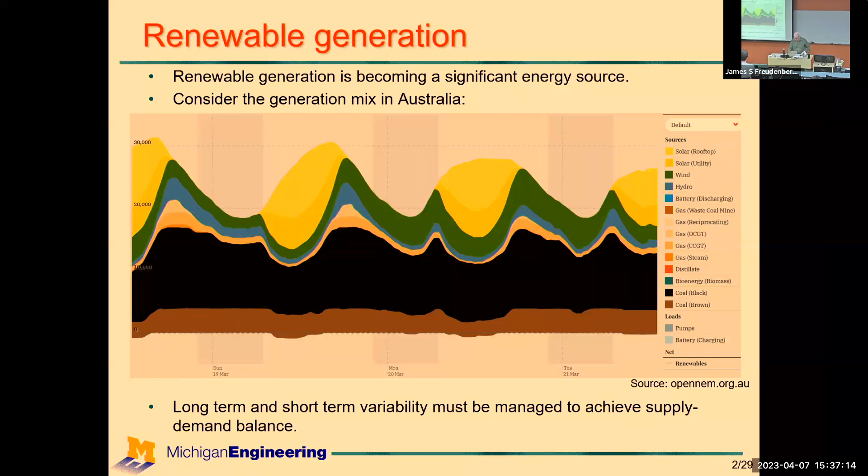So what we want to achieve is non-disruptive load control. What does that mean? It's being able to establish some level of controllability from loads in a way where the consumer is not impacted at all. They're oblivious to the control action going on. So it's non-disruptive to the load.

Load shedding, load control in a coarse kind of way has been around forever, but it is disruptive. On a hot summer's day, just when you want air conditioning running, it gets interrupted because there's peak load and they need to shed some load, which is quite disruptive for the consumers.

We want something that we can exploit without consumers having any knowledge of that. Some of the work we've looked at is large loads like building heating, ventilation, air conditioning type loads, but I'm not going to talk about that today.

I'm going to focus on harvesting controllability from large numbers of small devices. We've put a lot of time into looking at thermostatically controlled loads, so air conditioning, refrigeration, heat pump type loads, and exploiting that to levelize the variability in renewable generation. One can do similar tricks with things like electric vehicle charging, and I'll talk a little bit about that at the end as well.

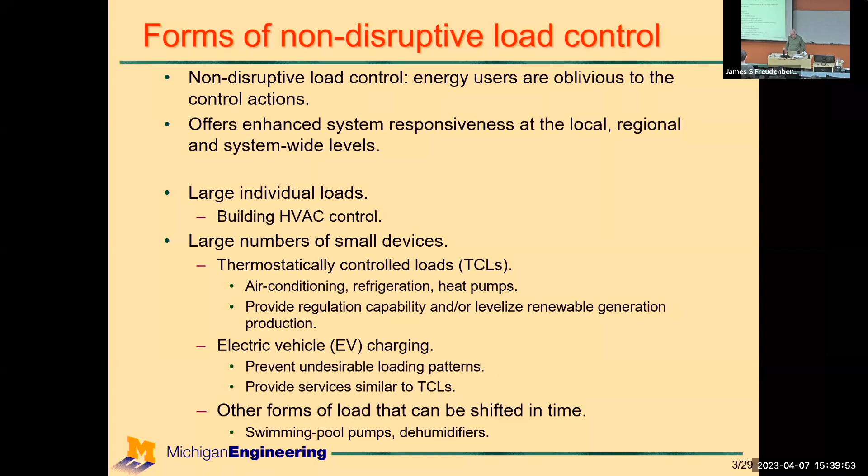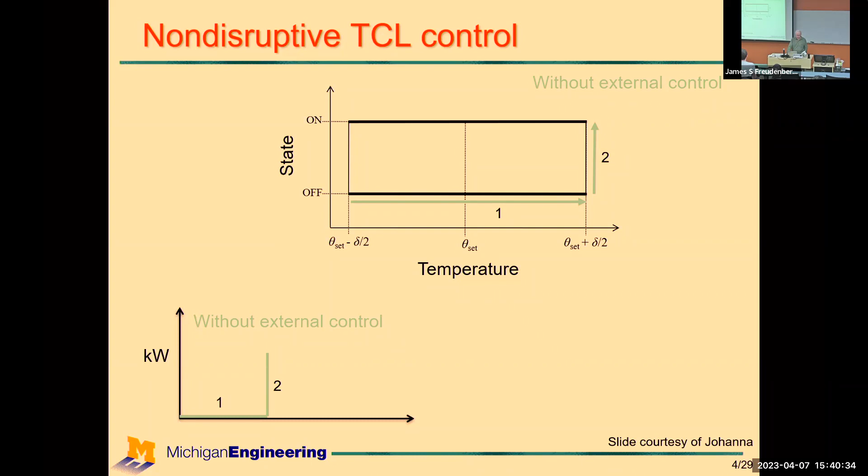So I stole this slide from Johanna, but it nicely illustrates the concept of non-disruptive control of thermostatically controlled loads. If we think of the normal pattern of loading for a TCL, when it's off the temperature is rising, and then it turns on when the temperature reaches the upper threshold of the hysteresis band. Then it's on for a period of time and cools the space down, then turns off again and proceeds around the limit cycle.

We can introduce a control strategy that says, okay, we want this thing to run differently. We allow it to be off and the temperature is rising. Before it gets to the upper threshold, we turn it on a little bit prematurely, and then we cool down. But before it gets to the lower threshold, we turn it off a little bit prematurely as well.

The outcome of that is we get these pulses of demand, and we can move those pulses of demand around. If you think about an individual pulse, well, what can we do with that? But when you aggregate it across tens of thousands, then you get a significant amount of controllability out of that. So that's the general idea at the grassroots level of each individual device.

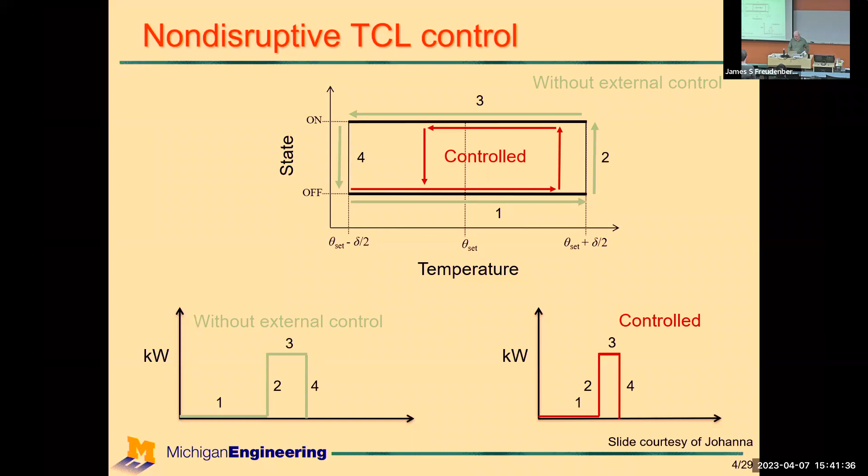But stepping back, what is it that we want to achieve with ensemble load control? We want to be able to meet competing objectives, that the load has certain requirements that have to be met, but we want to provide some system service as well. And they are usually competing, as we've sort of seen.

There's also this idea that load control strategies must be consistent with legacy operating philosophy. There's an enormous amount invested in the way power systems operate now, and that's not about to change. It probably couldn't change. So we need to have some overall load control scheme that is consistent with that higher level power system operational strategy.

But we also need to be able to access or send some signals out to the individual loads, and keep in mind this is large numbers of loads, tens of thousands, potentially millions as schemes grow. To do that from a centralized fashion, where there's some central controller individually addressing all of those loads, doesn't seem like a particularly practical outcome.

So the idea that we have exploited is to say the load aggregator is broadcasting a common signal to all of the loads. They're listening and receiving the common signal, and then they interpret that for their own individual circumstance. Each load makes its own local decision based on that broadcast message that's being sent to everybody. I'll come back to different ways that works.

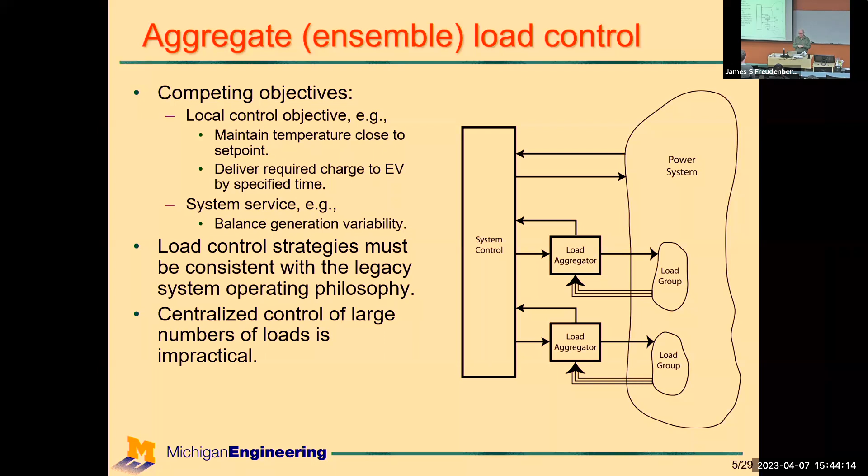So that's the load aggregator working downwards to the load side. And then on the upward side, the aggregator is receiving signals from the system operator and also providing information back to the system operator. It might be availability or price, who knows what, but there's that interface on the system side as well. So that's the overall kind of strategy we've been exploring.

Okay, so aggregation of TCLs - the way that we've approached that is we need to take into account the natural dynamics of the devices, the hysteresis-type process described a little bit before. The starting point for doing all of that is to build up a model that captures the overall dynamics of the system. We've got lots of individual devices, and we can't gain a whole lot from tracking every individual device. So we can aggregate all of that behavior together into what I'll show as a bin model.

The temperature associated with each TCL is influenced by random perturbations, things like doors opening, windows, and so forth. That's introduced in the model as noise, and we need to take that into account. And every thermostatically controlled load has slightly different characteristics, different thermal properties and so forth, so we have a heterogeneous population. So the aggregation is inherently inaccurate, stochastic, but we can still make use of it both from an analysis point of view and introduced in a control sense as well.

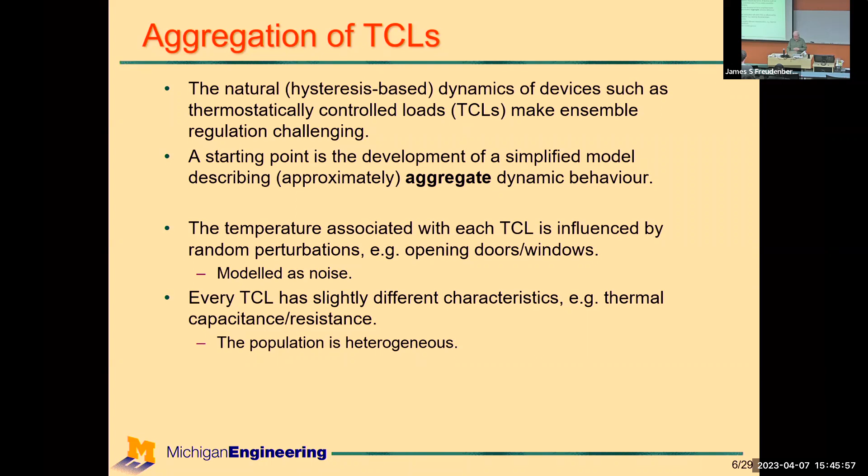The gist for aggregating or building a model of a large number of devices is this bin model approximation. So we can think of this large population of thermostatically controlled loads. We first normalize the deadband of these devices so that we can think of everything operating over that common upper and lower temperature band. And then we want to take all of the devices and map them into that common deadband.

If we think about the temperature distribution of all those devices, there'll be some stochastic distribution across large numbers of loads. We'll expect to see some distribution between the lower threshold and the upper temperature threshold spanning between those two. And also the devices will either be in the on state or the off state. So we end up with a probability distribution across the temperature band in the on state and the off state.

And then we can approximate that distribution using effectively a finite element approximation.

What that leads us with is this set of bins - in the red case - that describe the on state. So a TCL has a certain temperature and is in the on state, which places it in one of the red bins you can see there. The other TCLs are in the off state with a certain temperature, so they'll fall somewhere in the blue bins. So every device we can think of as lying in one of those bins, either the blue ones when they're in the off state or the red ones when they're in the on state.

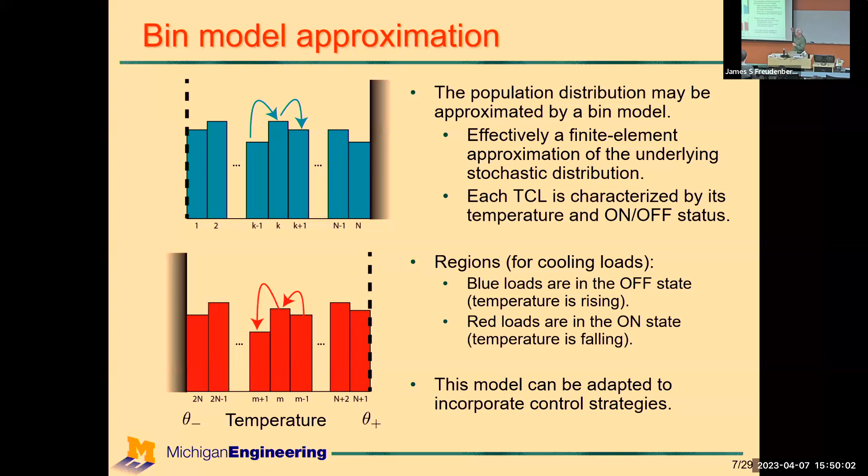We can write an alternative formulation in terms of continuous time. In that case, the steady state behavior is given by the eigenvector corresponding to the zero eigenvalue. So that's our model - we might have tens of thousands of devices, but we're mapping them into a relatively small number of states, a state associated with each of those bins.

Firstly, a homogeneous population, so there's no noise in this system and everything is identical. We assume initial condition with all the TCLs in the same bin, which is the last bin before switching on. So the dynamics are such that as time progresses, all of the TCLs switch on at the same time. Because they're homogeneous, they will then propagate through the deadband, and they will all switch off at the same time, and they'll propagate in the opposite direction and they'll all switch on. So one would anticipate coherent behavior if the model was behaving properly.

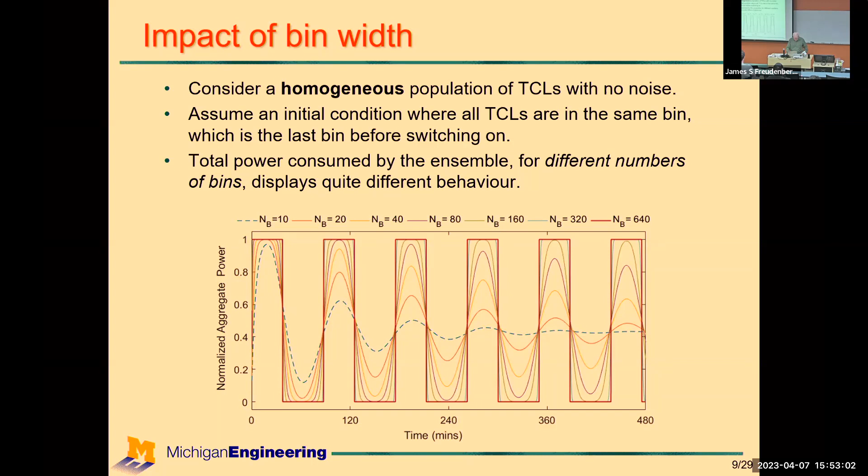In this case, we've added, firstly, it's still a homogeneous population, but now added different levels of noise. We've used the most accurate model, the one that corresponds to the square wave with 640 states. That's the case in all cases. And so if we have zero noise, we recover exactly that square wave.

But as we add noise to the system, it breaks the symmetry. So we're starting off with a homogeneous population all in the same bin. If you add noise, then that's going to spread that peak of devices, so synchronization gets broken by the noise. And you can see that there, again, is a nicely damped behavior. But in this case, that's true damping. It's coming about from the noise that is part of the system.

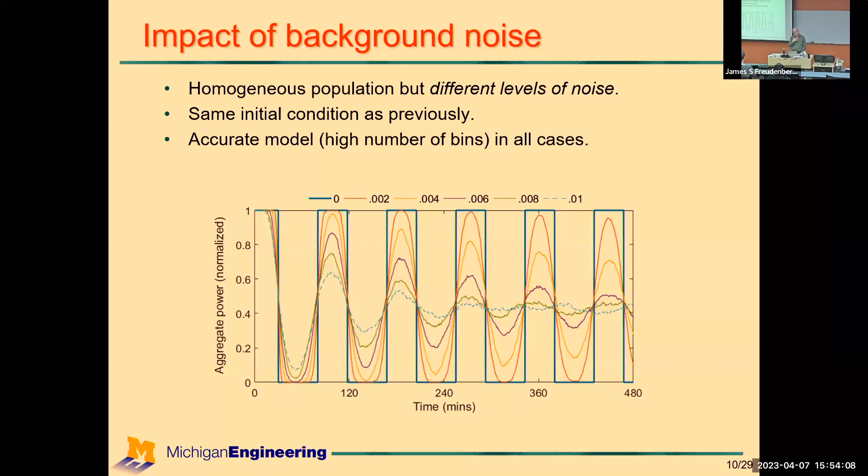So the message is modeling is important, and bad modeling can sometimes be interpreted in the wrong way. So I want to move on and look at three particular control strategies. There's a whole lot of different strategies that have been proposed, but I just wanted to look at three. And the nature of the talk is to look at ways that they all have some amount of trouble, so the message is we need to do careful analysis of these models and of these different control strategies, or we could end up with some unusual behavior.

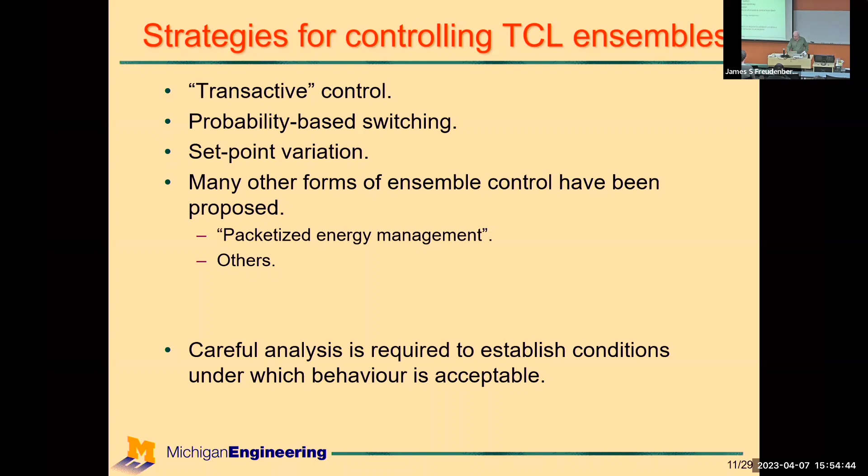So I'll focus firstly on what's called transactive control. This was pushed heavily by the Department of Energy for a while, and then fortunately they seem to have given up on that. But it's a prices to devices mechanism where now the control strategy is one that is money related.

So the idea being sort of given by this little figure here, that for air conditioning, as the temperature gets higher, my tolerance of that higher temperature weakens, and I'm willing to pay more to receive electricity to deal with that higher temperature. So there's a mapping between the temperature and the offer price. If it's a high temperature, I'm very happy to pay more. If my conditioned space is already at a low temperature, I don't really care and I'm not going to pay so much for it.

That's the general idea. So the temperature is evolving, as we've seen in this kind of normal hysteresis loop. Therefore, the offer prices that each individual is willing to offer is evolving in the same way. The market is cleared periodically. So what one ends up with is a period of continuous behavior where the devices are doing their thing, the offer prices are matching that. And then there's a point where the market is cleared, which is a discrete event on that system. So we have a classic hybrid dynamical system: a period of continuous dynamics, then a discrete event, then another period of continuous dynamics.

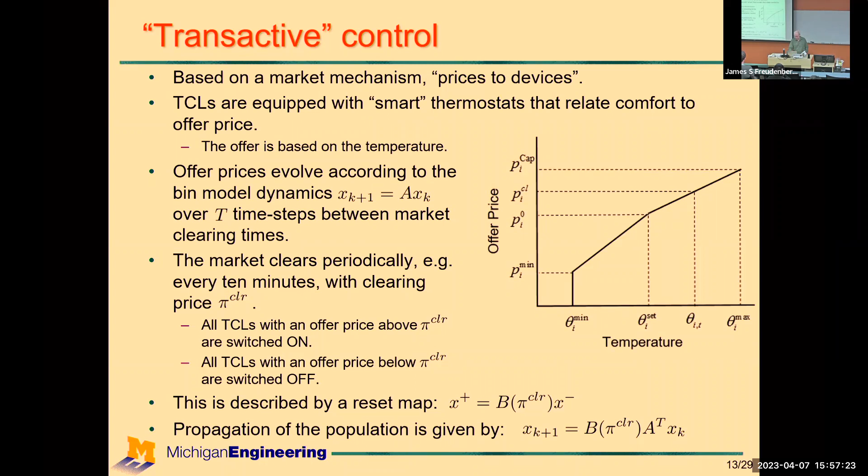This is the restart and the reset, and it's price dependent. So depending on what price is being broadcast out, it will alter the dynamic behavior of the overall population. The important thing is that all TCLs with an offer price above the clearing price get switched on, and all TCLs who have offered less are switched off. That's driving this reset matrix here.

So what does that end up doing to the overall population? If the price is low, the top one indicates a clearing price of 10 units, that's going to lead to a bunching up of the devices at the cool end of the hysteresis band. Electricity is cheap, people are happy to be utilizing that electricity, and it leads to this kind of bunching up down the far end.

The population of off states is shown in blue, the on states are shown in red, and this is the distribution at the instant prior to the reset event. So we end up with a limit cycle happening, and this is what things look like just before the reset happens.

If we transition down to the bottom, prices are now high, up at 30 units, and accordingly, people are less willing to cool their space, so the overall population of TCLs migrates towards the top end, the hot end of the schedule. In between, as the price varies, we can see there's that migration from one end to the other.

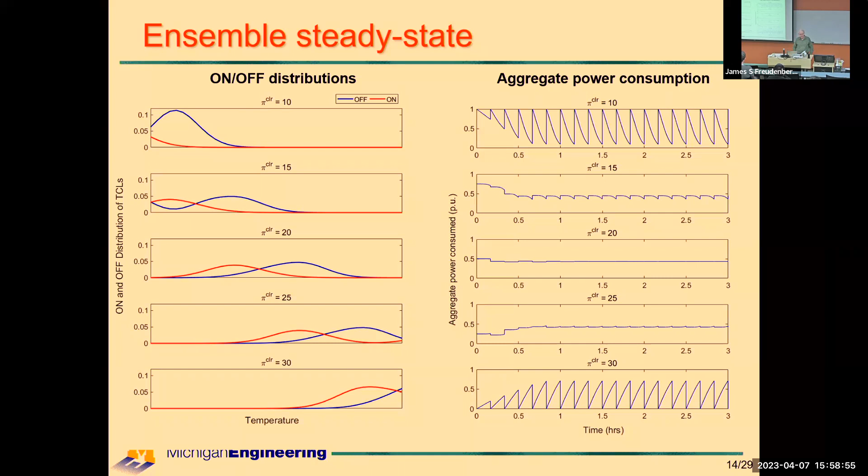One of the interesting things is that if you introduce a dither in the price, then you can actually synchronize all of these devices. And I'll show a little video if it works.

I won't show it if it doesn't. It's one of the joys of Microsoft that it kind of works every other time, but not when you want it to. Okay, we'll forget that.

It was working before. Anyway, the idea is that as the price dithers, the devices respond to that. They kind of get pushed from one end, they get pushed from the other. The nice little animation shows it, but it's not going to work now.

It's a case where when you switch between two stable systems, you can end up with an instability out of that, and it's kind of counterintuitive. You think if I've got two stable systems, I should be able to switch between them and still maintain a stable outcome. Well, that's not necessarily the case.

This is a situation of that form where we're switching between two stable cases, and in doing so, we end up with a synchronization. We can't go unstable because there's a finite population, but what does happen is it becomes totally synchronized.

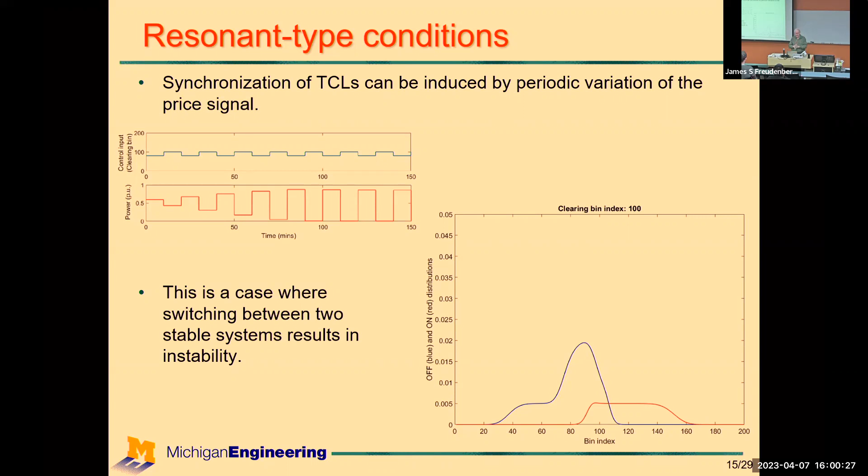Okay, moving on to probability-based switching. This is probably the form of control that we've exploited most, and Johanna was leading a project with ARPA-E where this was one of the main control strategies we were interested in.

In this case, we have a bin model that's enabling us to do a one-step-ahead prediction. We have a reference signal that we want to track, and we obtain an estimate of the population, pass that one step ahead through A, look at the power output through the C matrix, and obtain this difference between what's desired and what our estimate is of the total power demand.

So that mismatch drives this, is proportional to and drives this u_pop, which is distributed out to the total ensemble. The scalar is assigned to the bins using weighting factors, and on the next slide I'll show the impact of choice of weighting factors. Depending on the weighting factors, you can end up with a non-negligible impact on the overall form of behavior.

The really cool aspect is it meets their requirement for being able to broadcast out to all of the loads a common signal — send out to all of the loads a probability number that's associated with each bin. So if we have n bins, the length of the vector that is distributed to everyone is going to be n.

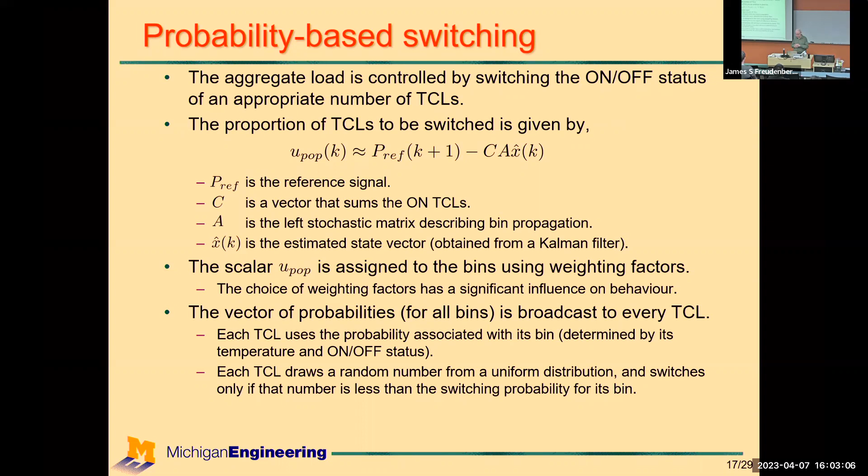One of the things one does have to be careful about, though, is in choosing the weighting factors that we want to use to distribute this control signal.

This little experiment is just a step response in the power reference. I want my nominal power running at 1 per unit in steady state, and then I want to step that up by a certain amount. In our intuitive thinking of how controlled devices should respond, I apply a step and expect to see some nice first or second order response tracking that step. This control scheme, the ensemble of TCLs, doesn't behave like that.

If I introduce a step, I immediately change the status of a certain number of devices, and I'll immediately see a step. But if I don't do anything further, what I'll see is this relaxation of the total demand. Here's my initial condition, a per unit value of 1. I get my step up, but depending on how I've assigned the weighting factors, under all conditions it will return back to that value of 1 — quickly, or it might take much longer.

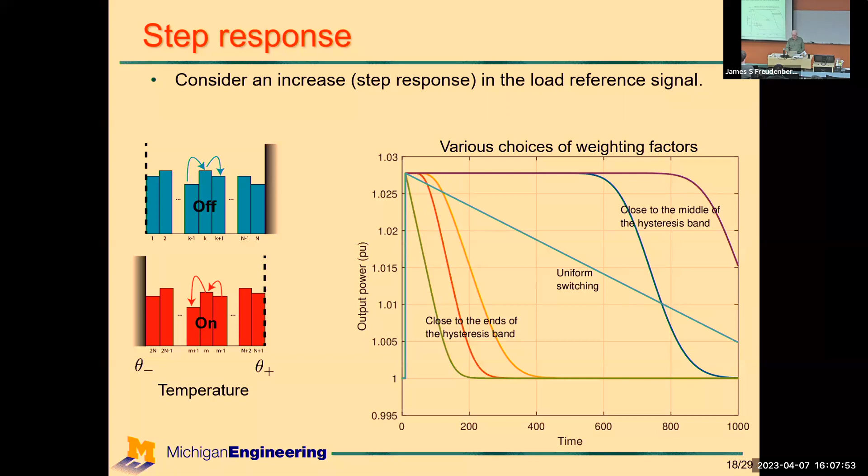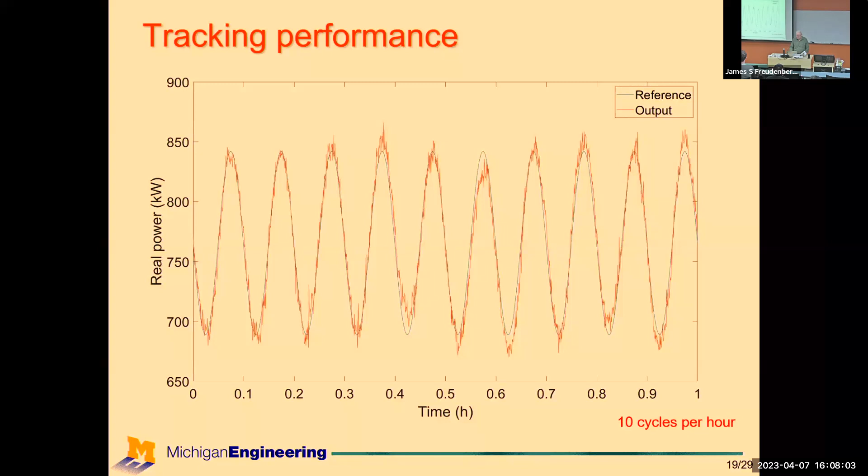The other thing with this model that we've recently discovered: when we're tracking a signal that's, in this case, 10 cycles per hour, we get quite good tracking out of that. But as we speed up the reference signal, there's an emergent form of behavior that we're observing.

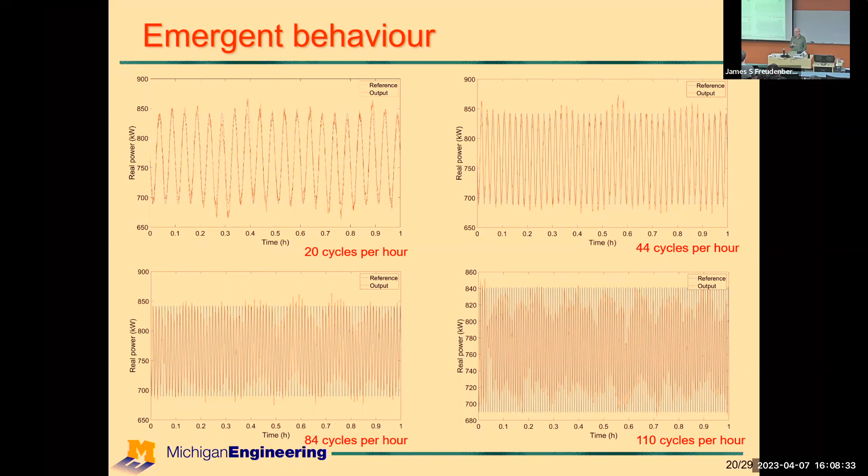It has something to do with what's called the lockout phase, where when a TCL turns off, you can't immediately turn it back on again. But there are more complicated things going on there as well. So it's an open question, but it does highlight the fact that we're dealing with a nonlinear system — and when you're dealing with nonlinear systems, anything can happen.

Well, not anything, but lots of unusual.

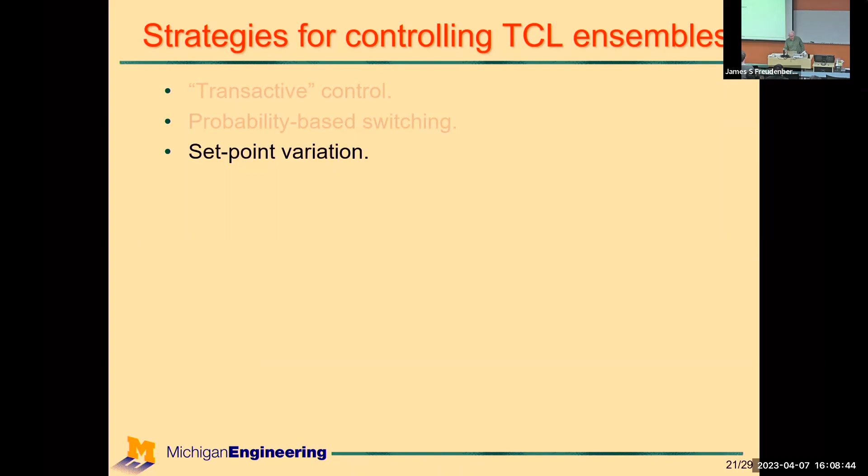The third and last form of control is set point variation. The idea is to move the set point and keep the upper and lower bounds of the hysteresis loop symmetric about that set point. So as you move the set point up, the deadband moves up with it. If you move the set point down, the deadband moves down.

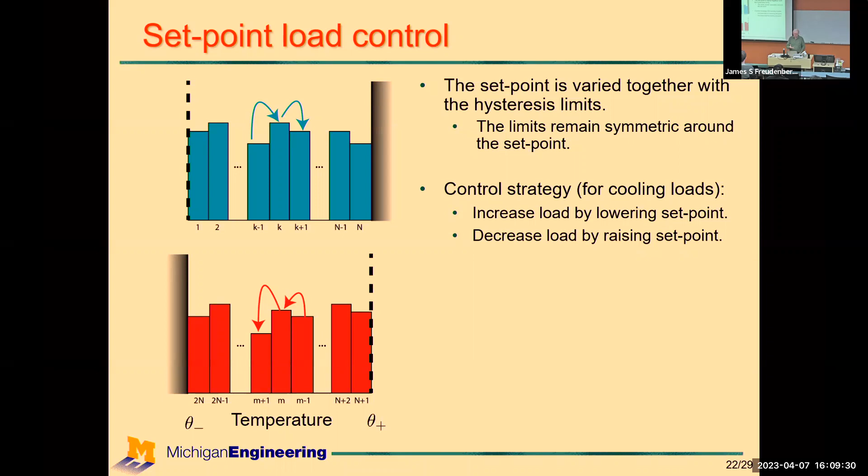The control strategy comes about because we get an increase in load by lowering the set point. When we lower the set point, we cause devices to switch on prematurely and so forth. So we're moving the entire set point up and down, and that gives us the control in this case.

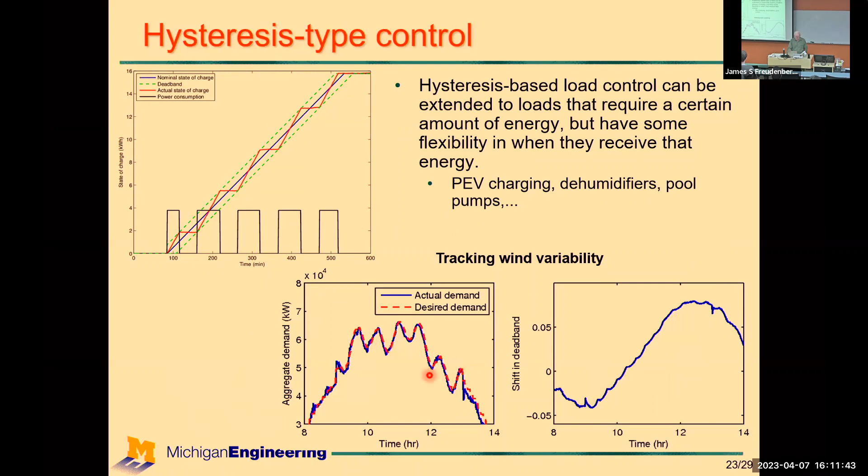In this lower figure, we used that scheme to track a fairly weird desired demand — actually a demand that shows the overall load demand but with wind power variation on top of it. The dashed red line was the desired demand, and we were able to track it quite well using this control scheme. The shift in the deadband was not particularly extreme, just moving a little bit, but aggregating over a large number of electric vehicles gave us that level of controllability.

Okay, so that's encouraging. What's not encouraging is that this is, again, a hybrid dynamical system, and it exhibits some interesting forms of behavior.

So we're dealing with another little experiment. We're putting this triangular wave into the bin model associated with 2,000 electric vehicles, each with a charging power of 4 kilowatts. The model is quite accurate under this condition shown here.

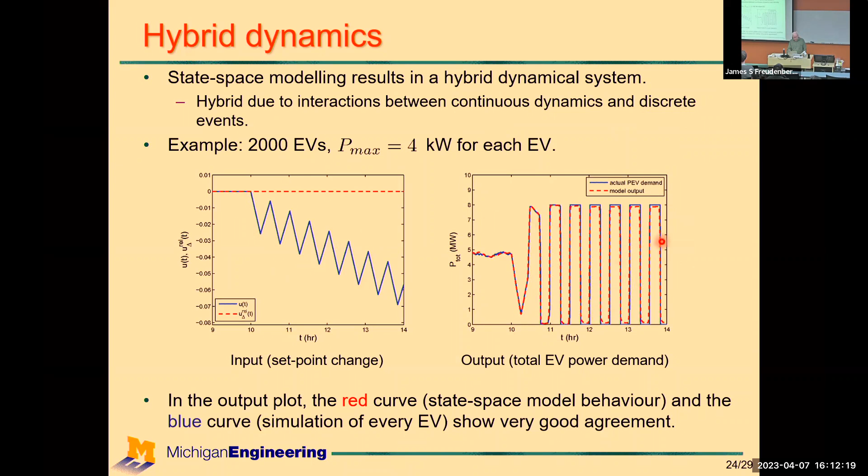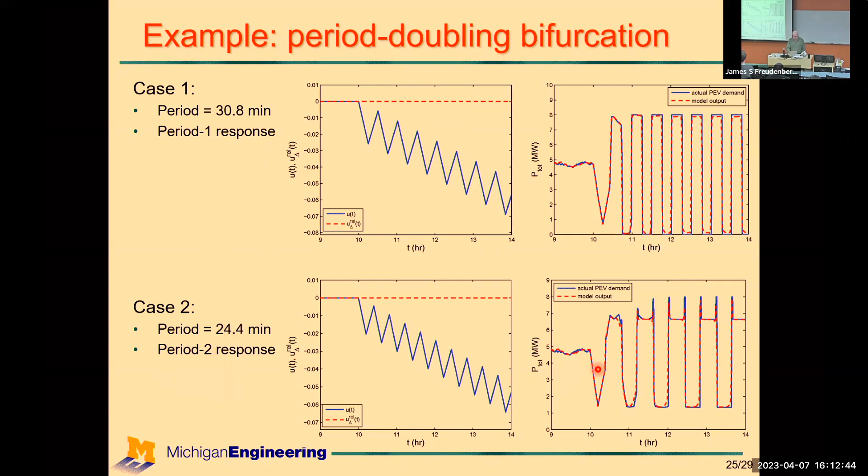What we observed, though, is as we vary the period of the oscillation, we get these period-doubling bifurcations happening. So for a period of 30.8 minutes, it's oscillatory with period 30.8, that's the outcome. When we reduce the period to 24.4, we get a period-2 response. So there's clearly a nonlinear phenomenon going on there.

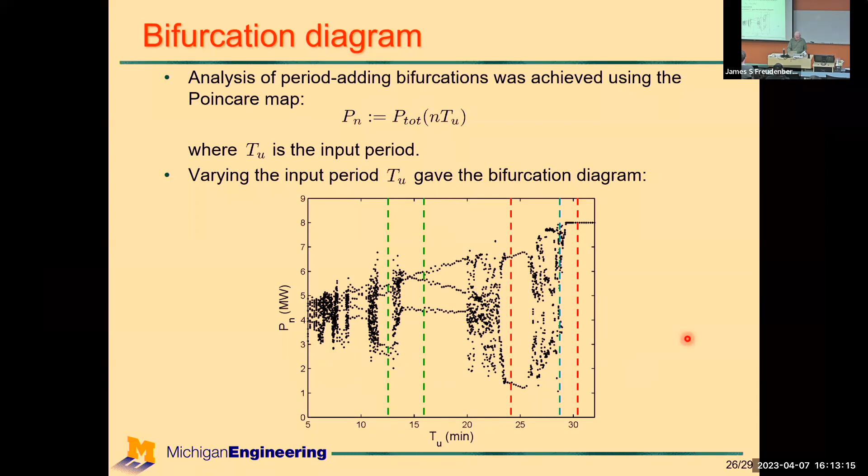In fact, what we observed: the first case was period 1, the red dashed line is the second case, period 2. In between there's actually a region of chaos. And as you further increase or decrease the period, there's more chaos, it breaks into period 3, more chaos, it breaks into period 4. So here's what period 3 looks like, what period 4 looks like, and all sorts of fun things like that.

Of course, in the region where there's periodic behavior, the model gives a good representation of simulating the thousands of electric vehicle chargers, or whatever the number was. But when we're in a period of chaos, chaos is infinitely sensitive to initial conditions. So, as you'd imagine, it's very hard for a model, a bin-type aggregate model, to capture what's actually going on with the overall chaotic form of behavior. The model breaks down, and that has consequences for using that model in control schemes and so forth.

This is still an active area. Work was done a few years back, but we've got new tools to play around with things. It's likely, though not fully convincing yet, that the periodic behavior or bifurcation behavior is due to what's called grazing or border collision bifurcation, where under certain circumstances the trajectory misses a switching surface, but under others it encounters that switching surface and a new form of behavior emanates from that. So there's a rich form of response that's possible here.

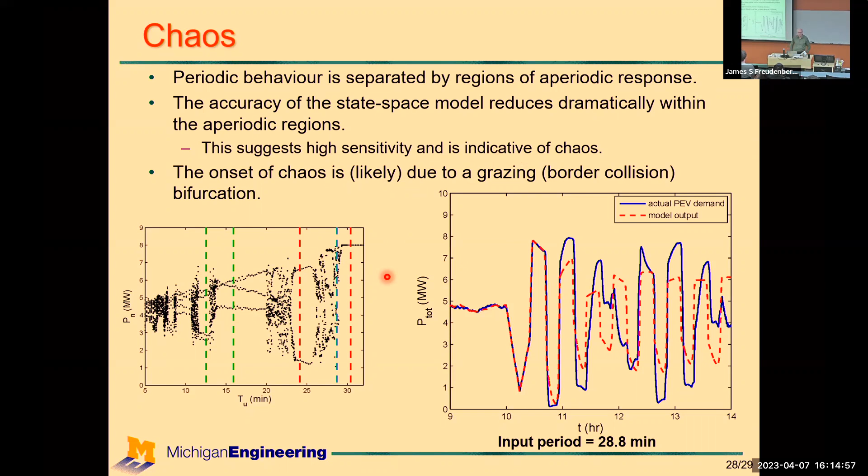So, in conclusion, significant actuation can be achieved through coordinating non-disruptive control of highly distributed loads. And hysteresis-based control of electric loads may exhibit rich forms of dynamic behavior.